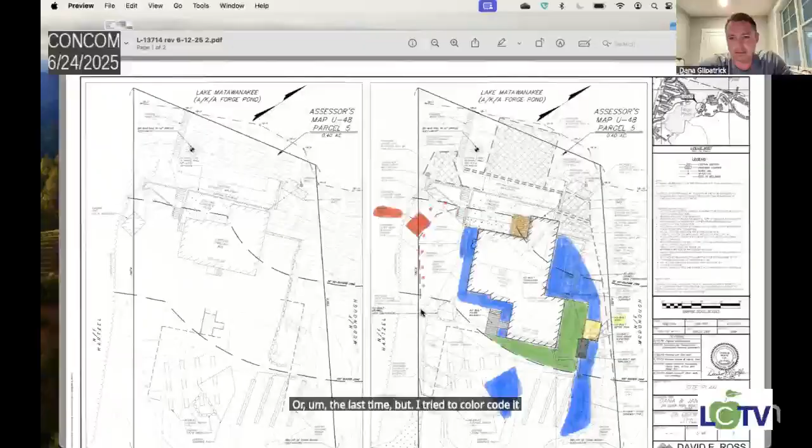Sure. So it was a bit confusing what the architect did the last time, but I tried to color code it so you can see what the differences are here, and I made a little table here, or key rather. Basically there was a crushed stone bed that was proposed right in front of my slider door somehow. That was an existing concrete pad, and it is still a concrete pad. Not being familiar with these drawings, I didn't realize that's what was being proposed by the engineers, so that is not crushed stone. That is concrete, as it was prior to the rebuild.

However, all this blue area is new areas of crushed stone that was not proposed in the initial plan, but was installed as part of the final grading. And then the other thing that was different is this was proposed to be a gravel driveway, and it was paved as an oversight when the paving company came, and it was a little chaotic. In addition, we have some plantings that were not part of the original proposal, but we put in here just because we like them.

So Tim, the request here is for a certificate of compliance with these changes. Yeah, so Dana was here at the last meeting, and the idea is just to go over these deviations from the approved plan and see how you guys feel, and if you're comfortable with approving it as is, or if you want to talk about other options.

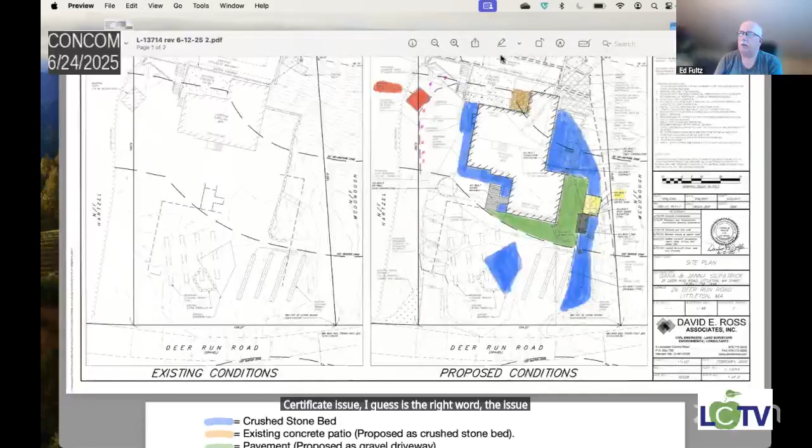So assuming that we're not going to expect a whole new plan starting all over, I'll propose that we accept the certificate issue, the certificate of completion, including the adjustments that are on the plan.

For something, sorry, I'm still new at this. For 26 Deer Run, DEP file number 2040884. Thank you, is that what you meant? That was yes. I'll second. Motion's been made and seconded.

Any discussion? Oh, just one quick thing. Where is the septic system located here? I'm just curious, did pavement go over the septic system at any portion? Part of the leach field. Do we know if Board of Health is good with that at this point? We don't, but the leach field is entirely outside of the buffer zone, if that makes a difference. Okay, like outside of the 100? Yeah. All right, is it shown on the plan?

Yeah. I did mention that to Francis, the Board of Health Director, so he is aware of it. Okay, and I would assume that they'll follow up with Mr. Gilpatrick if they're concerned. Yep.

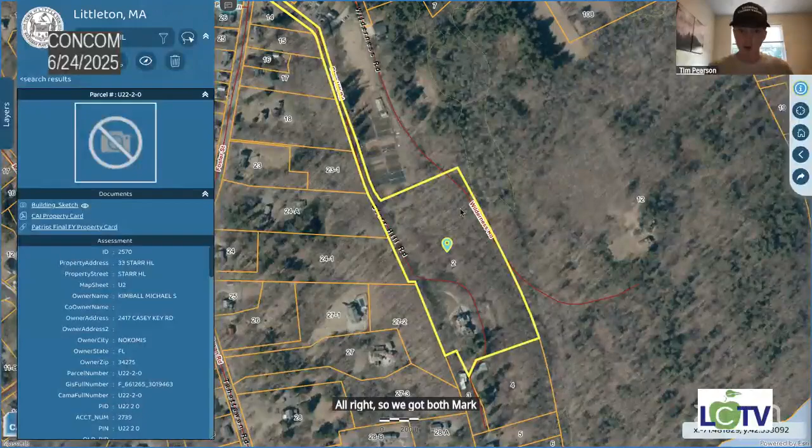All right, so we got both marks moved over at this point. It was brought to my attention that there was some tree clearing going on that might have been within the buffer zone. So here we have Prouty and the trail that comes from Prouty down here. The main wetland is on this side of the road. There is a culvert that goes under the road.

So the wetland kind of extends beyond this side under the road, and then runs parallel with the road on this side. The property bound isn't really accurately shown here — it shows Wilderness Road actually being on the property for 33 Starr Hill Road. But a large section of this area has been cleared, not entirely clear cut, but a large sum of trees have been removed. So that's the gist of it.

Can you lay out the timeline for us a little bit, Tim? Yeah, so, this goes back to — let me look at my calendar. This occurred... I believe it was, Andrew, do you remember the date? I believe we went out there the Friday before last. So, okay, had it been a week? Yeah, okay, so the 13th.

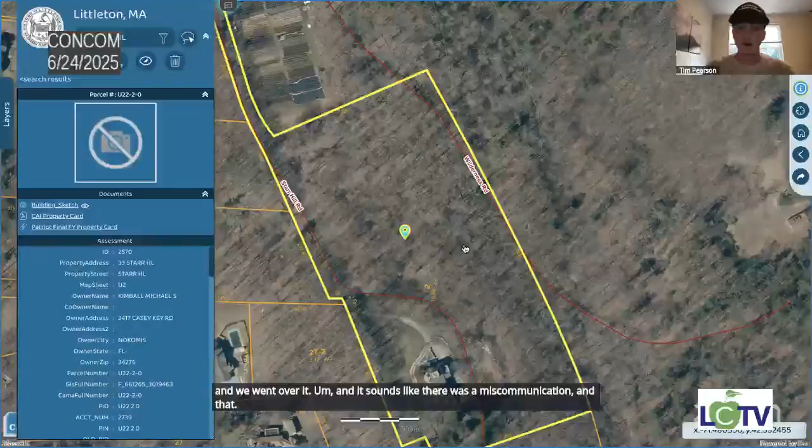And yeah, I met out there, the Gallaghers were very willing to meet me out there as soon as possible. I met them out there and we went over it. It sounds like there was a miscommunication, and that they were not aware that they were within the buffer zone. But I will let them speak to that.

And Sue, if you'd like to take it from there and share your screen, unless anybody from the commission wanted to talk. I think that's fine. Sue, if you've got information to lay out for us, I'd like to keep this confined right now to the discussion we need to have to determine whether or not we should ratify the enforcement order — so let's say nature and extent. Presuming we ratify it, then we'll talk about restoration and so on. Does that make sense?

Yep, that's fine. I'm just having a hard time finding where I can share my screen. Oh, here we go. I can at least show you. Oh, I'm sorry, who are you? I'm Sue Carter from Places Associates. Okay, thank you. Can everyone see my screen now? Yes, yes, we can.

You're probably going to have to orient us a little bit to what we're looking at. Okay, so Starr Hill Road, way over to the left-hand side of the screen is where Foster Street is. Starr Hill Lane comes up. This is the large house that's currently at 33 Starr Hill. So for those of you who have been out on the site, there was a pile of cut logs in this location, and you go downhill. New England Forestry — the road comes probably like this, and that's shown as Wilderness Road, and it actually curls up, and then right after this line, this wetland area here, it branches off.

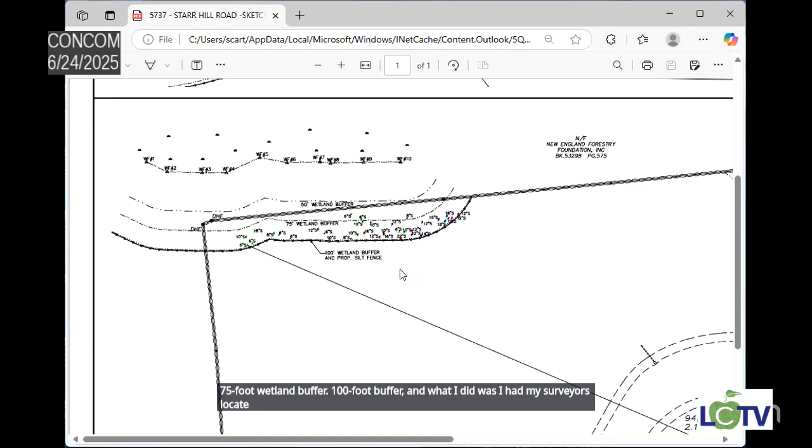And what I did was I had my surveyors locate every tree stump that was 6 inches or greater. What I have for you is kind of hard to see, so I did it at a larger scale. Let me zoom out just a little bit. I color coded the trees — if you see a 12-inch S, that means a 12-inch stump. In our rush to get this information for you tonight, my surveyor did not try to identify the tree type by the bark; he just simply located the stumps.

So what is up here represents what's shown here on the plan. There's this second wetland area with a buffer, and there is no work within that 100-foot buffer for that one. So once again, what's up above represents a 20 scale or a 10 scale zoom-in, and this shows it in relationship to the overall property.

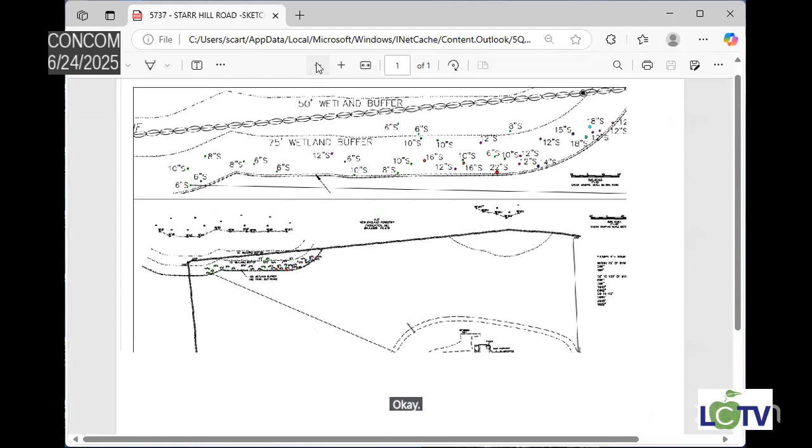I'm going to zoom out just a little bit so you can see the whole plan. So what we were able to determine is that there were 3 trees, 6 inches or greater, within 75 feet of the wetlands, and between 75 and 100 feet there were an additional 32 trees. I have a chart here I can zoom in on, if the commission would like, that states how many trees and which size diameter that tree stump is.

This is very helpful, Sue. I appreciate you guys doing the work to get this in front of us now. It's going to make for a much more productive discussion, I think.

I'm glad my surveyor could handle the heat today, so he deserves the credit. He was out there in the sweltering heat getting these located. I pulled field teams today because it was just too hot to do some things.

Mr. Gallagher, I see you've got your hand up. I want to make sure we're going to talk right now first about the nature and extent, and then we'll talk about restoration if we need to. Do you have comments on the nature and extent? Oh, you're muted, Mr. Gallagher, you're muted.

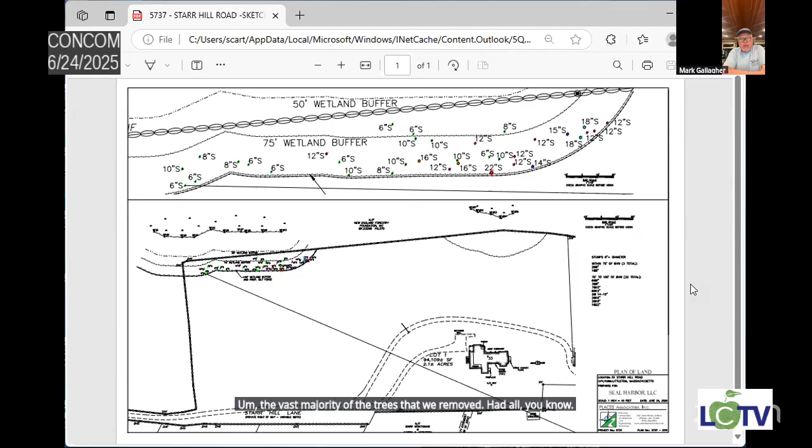Although Sue has pointed out there are 3 trees within the 75-foot buffer, and between 75 and 100 quite a few more, the majority of the trees—and we've left them there because Sarah asked us to do so—had all died. So although we can determine the bark on the trees, should we discuss a restoration, the vast majority of the trees that we removed had all passed their lives, and we removed them when we removed the invasives. So I just wanted you to know the history of the removal, and the reason that we were doing so was to clean up the property, get rid of the invasives. We were not aware.

Tim brought to our attention that there was, on the GIS, a wetland 100-150 feet away on the forestry property, but we were not aware. And as Mr. Crossman said, the closest to our property on this side of the road is essentially a drainage area fed by a stormwater catch basin up in front of the mansion on Starr Hill. That's shown on the screen right here.

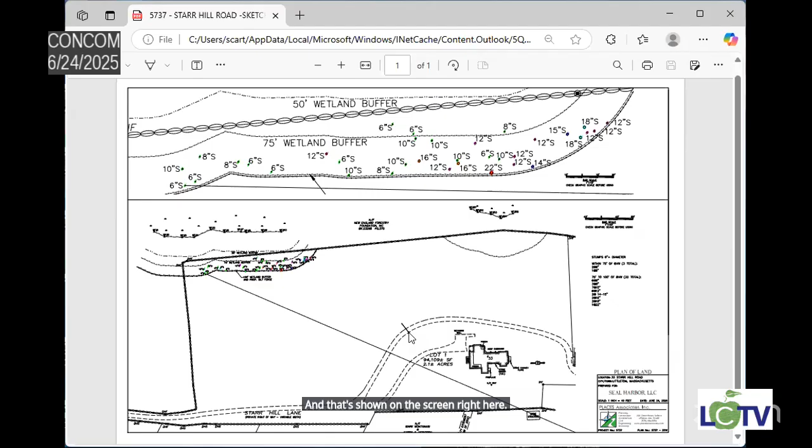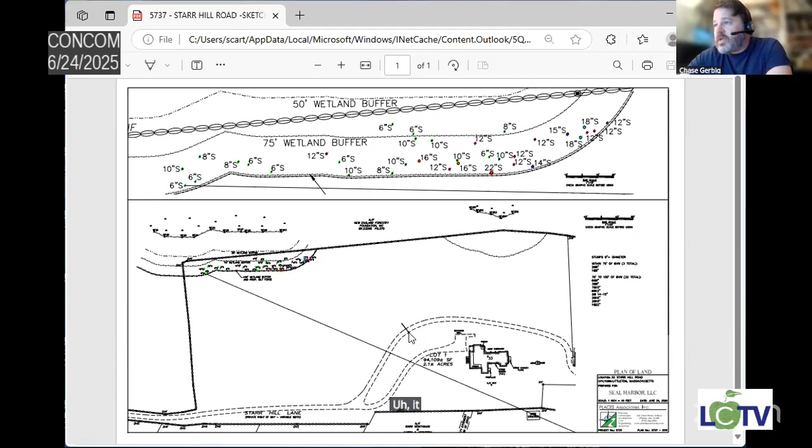There is one thing I want to address while we're talking about ratification of the enforcement order. One of the interests under the act is wildlife habitat, and it is not uncommon for applicants to leave dead trees standing in the interest of wildlife habitat. So I understand we're dealing with more than just dead trees, but it bears mentioning that dead or alive, there is ecological value and interest under the act, even with dead trees.

So with that, I'll turn it over to the commission. The question in front of us right now is ratification of the enforcement order. Tim, correct me if I'm wrong, we need a motion to ratify that. That's correct.

Is there any debate about ratifying this enforcement order before we move on to next steps? So are we saying this is or is not in the wetlands? Well, to ratify it would be to say that there was an impact to the resource area and that we need to take some enforcement action.

My take here is that there was an impact to the buffer zone. I think we will want to understand the extent of that buffer zone. There may be some disagreement, at least right now based on high level field observations, about the extent of it, but it appears there's no doubt that there was at least some impact to buffer zone.

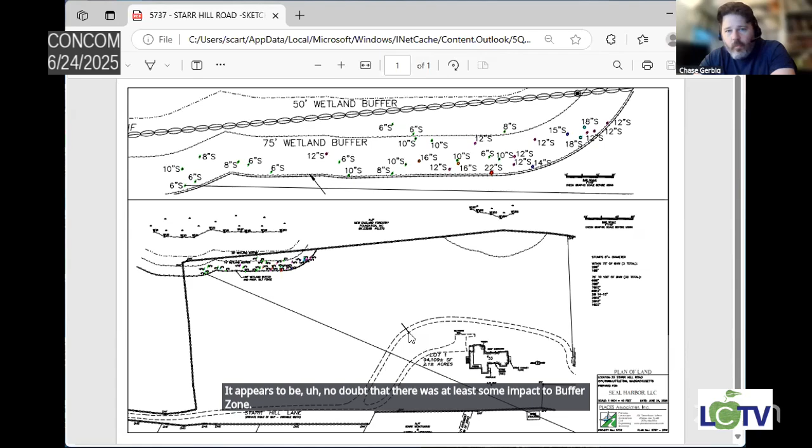I'd make a motion that we ratify the enforcement order. Second. Motion's been made and seconded. Roll call vote: Ed, aye. Carl Melberg, aye. Michael Livingston, aye. Kyle Maxfield, aye. Chase Gerbig, aye. And myself, aye. It's unanimous.

Okay, so now, Mr. Gallagher, we're going to move on to the second part of this discussion, which is where do we go from here? Let me put an idea on the table. Before we go too aggressively down the path of determining the right restoration in terms of tree replanting and so on, I think we should have a third party take a look at the delineation. Mr. Crossman, please don't take that as anything other than us needing to do our due diligence to confirm the line is correct. It sounds like this one might be a bit more complicated than normal.

My recommendation to the commission would be that we have a third party come out and take a look at that. I was thinking the same thing, Chase. I think that's the call. So I would support that. Sounds good. At your expense.

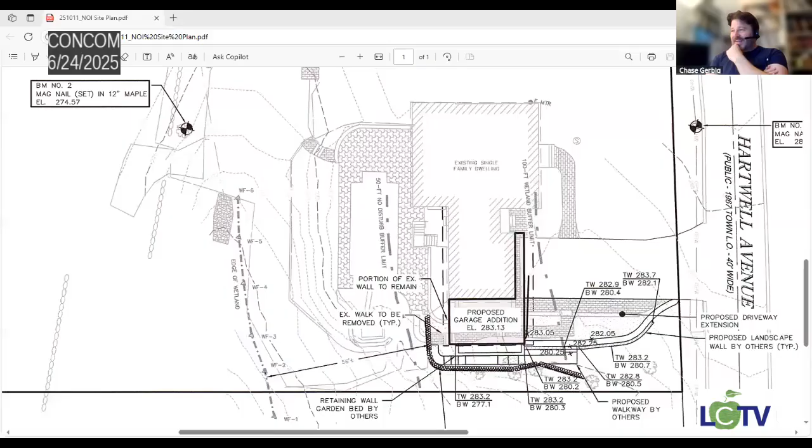All right, good evening. I'm going to scope out just a whisker so we can see the whole property. Everybody is familiar with Hartwell Ave and where 76 is. If not, let me know and I'll zoom over to the locus.

This is the existing property here. The property itself is just under an acre, goes back and up the hill and is all wooded behind. This is an existing cape with an existing two-car garage, with a walkway, patio, deck, and pool put in some time ago, plus a retaining wall. There are two different sheds, one here and another built off of it, and some trails. This is all fenced off in here.

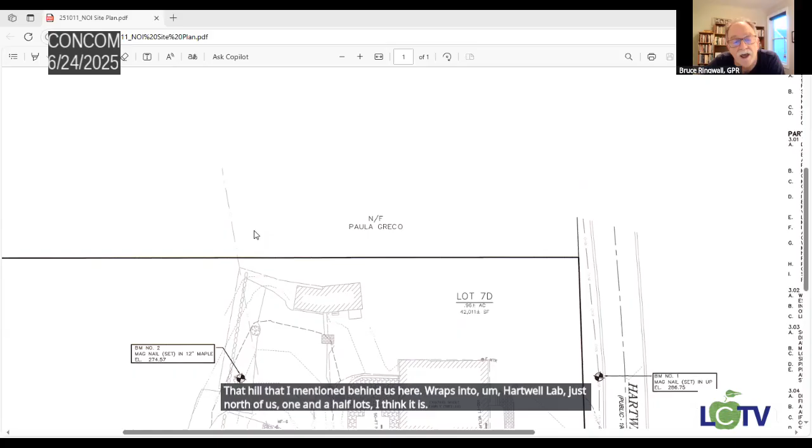The wetland line was delineated starting off the property here and coming up, terminating where the hill behind us wraps into Hartwell Ave, just north of us, about 1.5 lots. If there's any valley or swale at all, it's all piped to this point. Then here it opens up, and a couple lots south of here it's piped across a couple more lots before opening into a bigger body of wetlands.

Having said all that, the wetland line's 50-foot buffer comes through the backside of the existing pool. The 100-foot line is through basically the front of the house and the driveway. The side of the garage has an extended driveway that already comes out to a retaining wall and a walkway, plus a planter off the end of the garage, and then this walkway that ties into the back to connect front and rear.

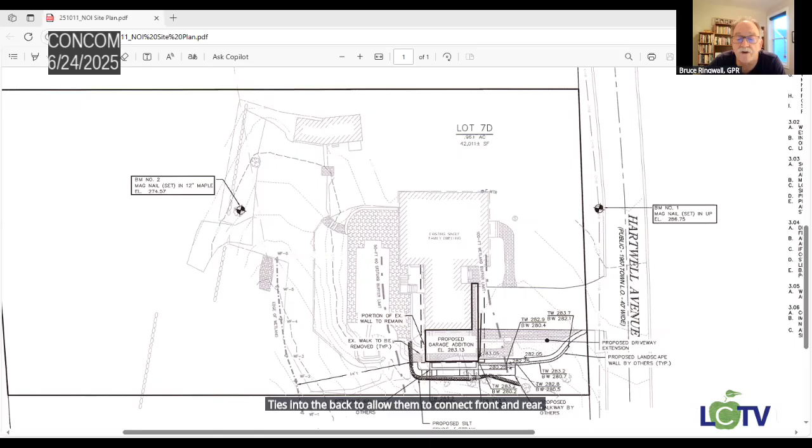This is all landscaped with stone mulch rather than mulch, with regular mulch up in here, nice yard and such. The plantings in this area that will get disturbed, the homeowner wants to replant outside the buffer in the front yard to maintain as many as possible. There is one tree here that will need to come down, right here.

We're proposing to widen the driveway and put an addition on, adding a third bay to the garage and living space above. We're actually going to take down the existing garage — this dash line pushes the foundation back. Actually, no, this is the line of the foundation right here, which comes to the front of the building just a whisker. The dash line is the roof overhang. We have erosion control proposed to be installed around the edge.

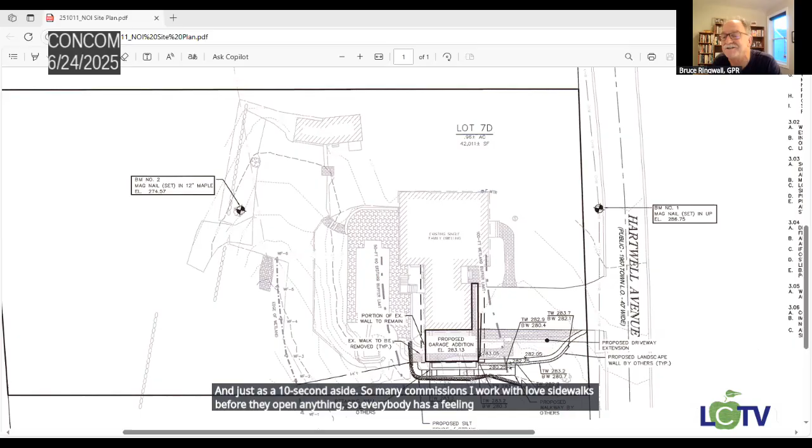I have photos, but we were about to set up a site walk — we did set one up last time before our timing got all messed up. As an aside, so many commissions I work with love site walks before they open anything, so everybody has a feeling for what the site looks like; it saves time too. I'd love to schedule a site meeting with you folks now, because I've seen one thing on site I want to address with a modification to the plan, but I don't want to do that until you've all gotten there and we can have a conversation. So if we can go for a continuance to our site walk, I'd be happy, and I'll take any questions you might have, but we went through that step once.

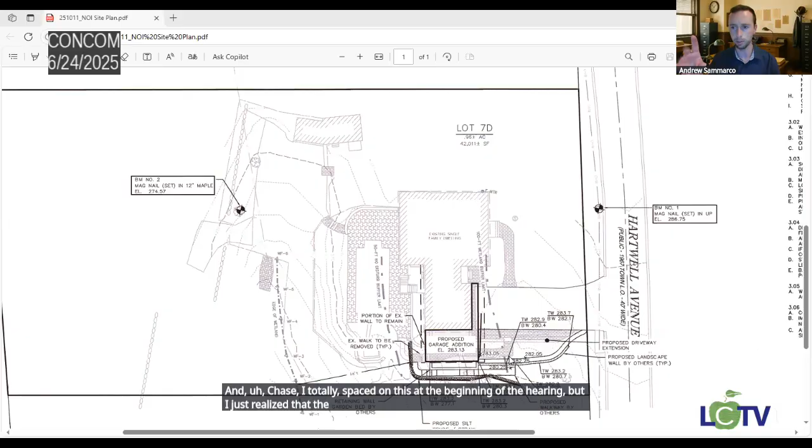Chase, I totally spaced on this at the beginning of the hearing, but I just realized that the cemetery department, we have a new area that was just donated a couple of years ago that actually abuts this. So I'm going to recuse myself from this hearing. I should have done that at the beginning.

Sorry about that. I don't think you need to recuse yourself from a cemetery commission to doing another public job, Andrew. I appreciate it, but I appreciate your opinion as well. If you think it's important for you to recuse yourself, go for it. But I think that's a conservative approach. So do whichever way you like, but certainly we value your opinion a great deal, especially since you know the area a little bit.

I haven't, with the sharing of the screen, I can't see who all's on. Do we have a quorum otherwise? Yeah, we do have a quorum, Bruce.

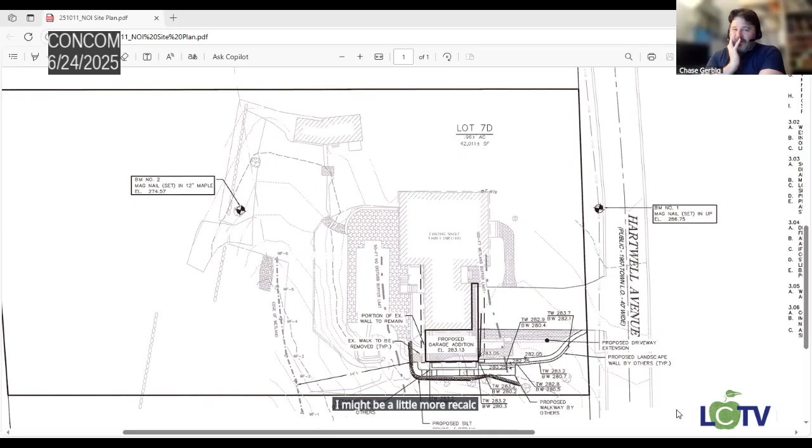Okay, thank you. And I'm going to guess, I might be a little more recalcitrant, Andrew, with your recusal if I thought this was going to go on for a long time, but I don't think this will go on for a lot of meetings. Yeah, I can't see anything here, and I've done a few things. We'll have a site walk and we'll close, I hope.

I think that sounds perfectly reasonable. But before we get to scheduling the site walk, Bruce, one of the things I want to make sure we haven't tripped over here is the addition of impervious area and our wetlands protection, our local bylaw. So everybody knows our local bylaw for the 50-foot no disturb, but there is an additional impervious area piece. Have you looked at that? And if you have and you wrote it down and I didn't read it, then that's 100% on me.

In our project narrative, our garage living space we had 420 square feet of impervious area. So we're within your percentages and realm. Sorry, I didn't read that part. No problem. Okay, looks like we're looking to schedule a site walk here.

With the 4th of July in between, what's everybody's pleasure? Could we do it early next week so that Bruce and his client have a chance to sort of process things and be ready for the following meeting? Or should we do it after the 4th?

I can tell you, I will be out of town the first 2 weeks of July. When's our next meeting? July 8th, I believe we said. Yep, that's correct. So I'm going to be missing the next meeting, just so you're aware. Hey Chase, I'm going to be out next week.

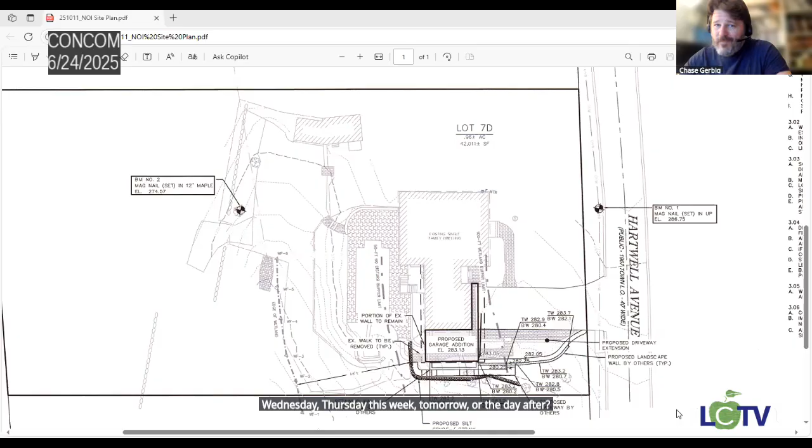What does this week look like for folks? Do you tuck something in Wednesday, Thursday this week, tomorrow, or the day after? I could do tomorrow or Friday. Thursday's impossible for me. Okay, I could probably do Friday, but I won't be here for the next meeting, so I'm not sure that I'm terribly high on the priority list.

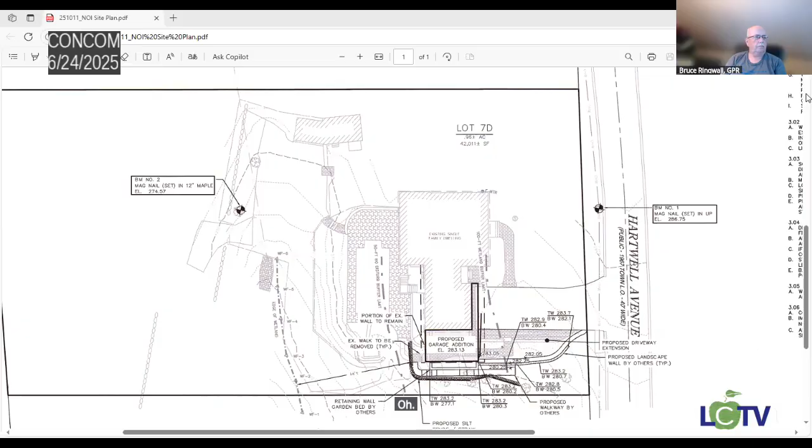I'm sorry, I didn't see who's not here at the next meeting. Ed Foltz. Oh, hey Ed, sorry, didn't see it. That's okay. Can I stop sharing my screen so we can see everybody? Yeah, go ahead Bruce, that's fine.

Thanks, that's much better. What do we think of just trying to rip the Band-Aid off and do it tomorrow afternoon? Would that be... Michael, you said you could do that. Yep, I can't do tomorrow afternoon, but if you guys are comfortable doing it without me, by all means.

What time are you thinking of? Michael, any thoughts? I can pick a time anytime. I am home rehabbing from total knee replacement, so this is going to be my first outing. I'm excited, I'm going whenever.

Aside from a 1:30 to 2:30 meeting, I'm available tomorrow afternoon. Carl, is there a time that could work for you? Probably after 2:30 would be better. Do you want to set it for 3:30? Yeah, let's do that.

3:30. Okay, so it looks like we'll have 3 commissioners that can make it, and maybe more, and we'll plan on seeing you out there at 3:30 tomorrow, Bruce. Tell Andrew to come too, he's good for this, we got to get him out of the office, especially where it's so old. Sounds great, we'll see you there.

There's a fair amount of parking in the driveway. We all know Hartwell's gotten faster with the paving, so there's a fair amount of parking on site. All right, and thanks guys.

Just a brief recap. We started a couple meetings ago requesting an addition within the 50-foot buffer and a septic system that was outside the 50-foot buffer. Since then, we've been trying to work with the commission, and we have moved the addition outside the 50-foot buffer zone. We have moved the erosion control barriers to the 50-foot buffer zone. We've added some dry wells. We provided a planting plan. We feel like we have done our best at this point to try and meet all the commission's concerns. We would like to move forward tonight and hopefully get to a point where we can get an approval from the commission. That being said, we're still open to discussion, and we are certainly interested in any input or conditions that would make this plan amenable to them, so that at the end of the day, we can move forward with the project.

I think Randy's grabbed the screen and is showing our planting plan, but I will let him discuss that.

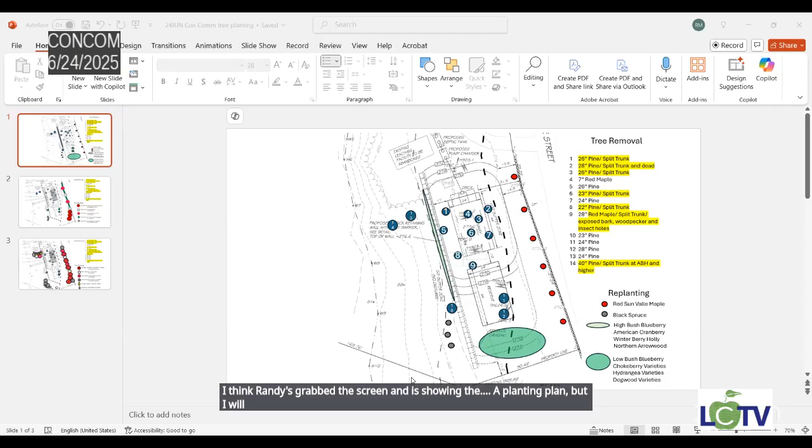Good evening, Commission. Where we left off from the previous meeting - apologies on that one. I was at an active training base, and in hindsight probably shouldn't have had the other meeting between helicopters and a bunch of other things. I was pretty much lost in that.

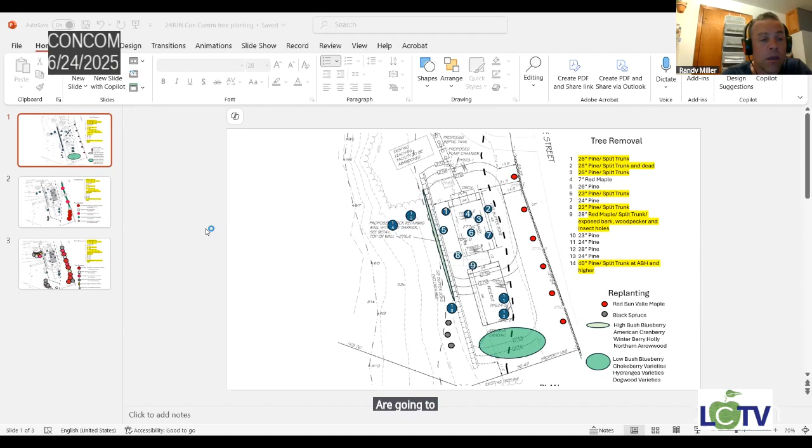So going forward, what I have here is basically just recapturing the last few meetings, with what I originally did for tree plans, and then this current one. At the second meeting, I created this plan, which showed the trees being removed - the red Sun Valley maples and black spruce. At the conclusion of that meeting, the commission determined we needed to adjust erosion control, and I needed to add more trees and do something with the shrubs to indicate how many shrubs were going to be planted. So for the next meeting, I created this plan.

This plan was basically me trying to up the tree count as best I could to try to meet the 2-to-1 ratio. In doing so, I picked the Green Giants - they weren't necessarily my favorite tree to pick, but I was able to put a lot in a small amount. However, during the course of that meeting, it seemed like the commission didn't really agree upon the Green Giants, which I can agree upon as well.

In light of that, the issues that were brought up were trees 11, 12, 13, and 14 that were being removed. We did talk about the arborists that came in for 13 and 14, and with 11 and 12, I just want to point out that during the course of creating the plan for the septic system, there were test holes dug. If you look at the screen, you'll see 11 and 12 had test holes dug next to them, and as a result some roots were dug up with those trees. So my concern for those trees still exists, with potentially them falling onto the septic system itself.

And then with this current plan, this was a little bit more of a hybrid between the first two.

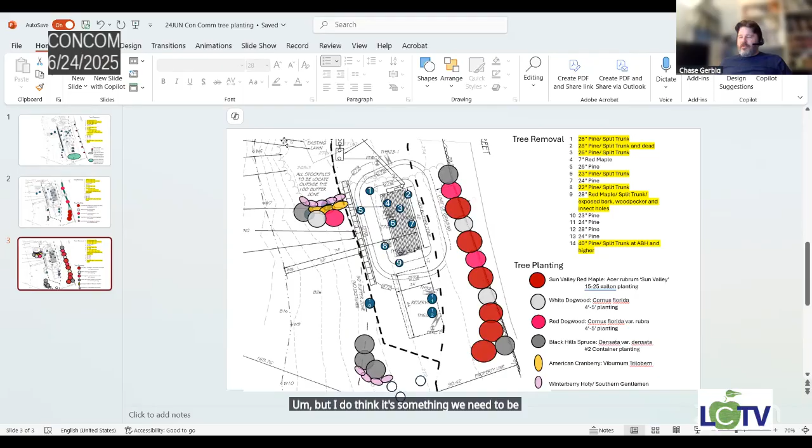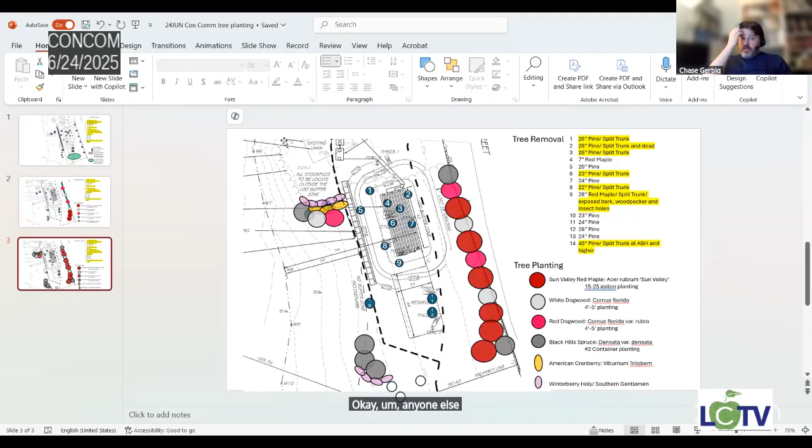I'm on board with those motions. Anyone else, or should we entertain a motion here? I'm liable to take silence for consent.

Before we get to a motion, Tim, I think a couple findings need to be memorialized, even though they're in the written components here. One, the removal of the trees within the 50 via a crane. Memorializing the findings that those trees in the naturalized areas of the site won't have their stumps removed. I think we want to make sure to memorialize that and make it clear, even though it's written down, these things can get lost.

Any other findings y'all want to see? I will tell you, John, you entertained the idea of moving the erosion controls down. I'm not sure it's necessary. What we're going to end up with around the tree is a bunch of mulch, that doesn't seem to justify moving erosion controls around. I don't want to move the line. I would be more in favor of new, temporary erosion controls around it or whatever. I don't want to give the contractor additional room to play. That's why we moved it back to the house anyway.

And I agree. I think we approved some tree removal at our last meeting, right? With the understanding it was going to be top down via crane, and we didn't require erosion controls. So I feel a little awkward asking Mr. Miller to do that now. Appreciate that. Thank you. Yeah, I'm much more comfortable with that remediation plan now.

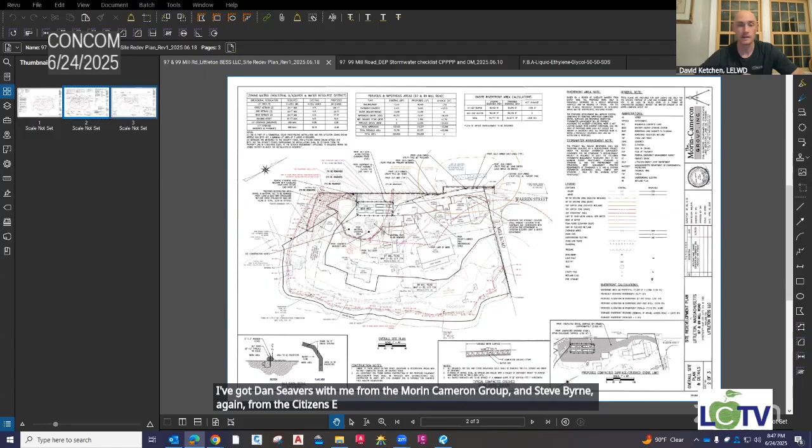Dave, is this your project here? Hey everyone, yeah, sorry, some connection issues getting promoted to the panelist position right here. Yes, this is my project. I'm Dave Ketchen, Assistant General Manager for the Littleton Electric Light and Water Departments. I've got Dan Seavers with me from the Morin Cameron Group, and Steve Byrne again from the Citizens Energy Group there. Dan is going to kick this off from our last meeting and last site visit.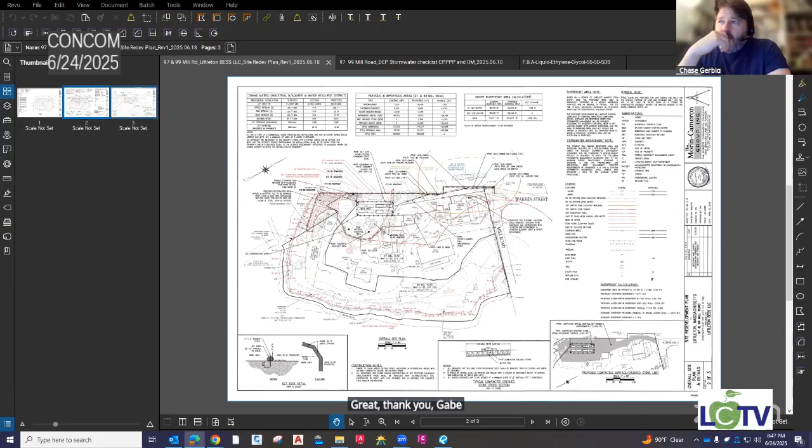Okay, all right, thank you, Gabe. So, for the record, my name is Dan Sievers with the Morin-Cameron Group. I am going to give a couple updates since the last time we met. First update is there is no update from DEP. Unfortunately we don't have a number yet or technical comments, so we're going to have to wait on that. Since we last met, we have gone in front of the planning board, and they have approved the project.

We also resubmitted to both DEP and Littleton Conservation the notice of intent, WPA Form 3, with updated fee, stormwater checklist including O&M plan, as well as a construction pollution prevention plan, and a revised site redevelopment plan. I can run through some of the updates on the plan, one being the applicant's name, which is Littleton BESS instead of Citizens Energy.

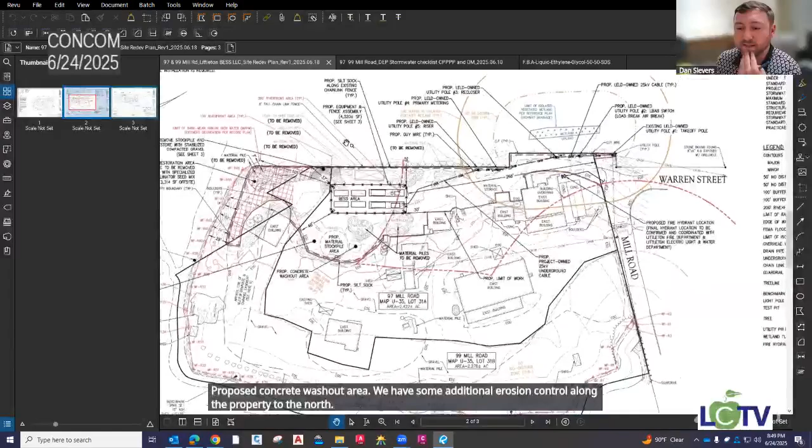Last time we met, we talked about some things we wanted to see on the plans and in documentation. Some of them being: the proposed material stockpile area, proposed concrete washout area, additional erosion control along the property to the north, and we've been in communication with the fire department. They told us it would be advantageous to propose a fire hydrant on the site, so that in the worst case scenario of a fire breaking out, which is not expected, but if it were to happen, there would be a fire hydrant on site that would allow the street to not have to be closed down.

Which we have proposed right here. We have a note that the final location is to be coordinated with the fire department and water department.

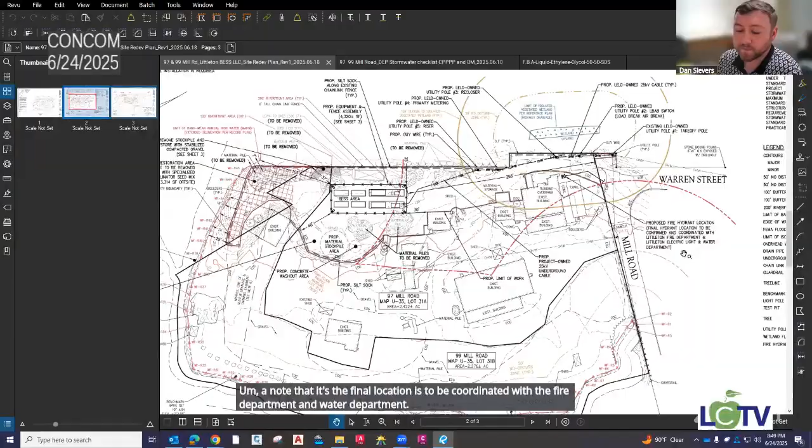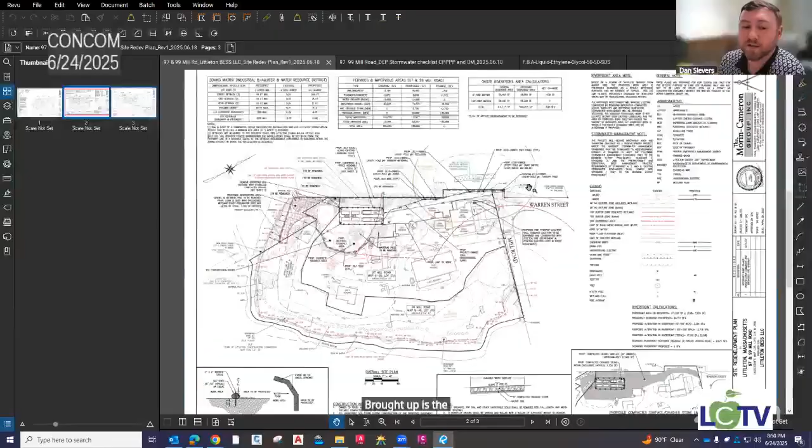So I think that's all the updates as far as the plans and submittals go. And I think the main other concerns the commission has brought up are the chemical makeup and the actual system itself.

Steve, are you on? Are you available to talk further about this? Yep, I'm here, Dan. Awesome.

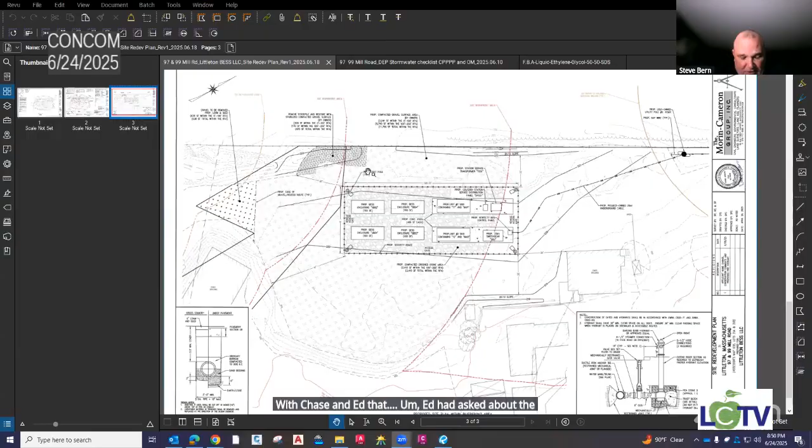Go for it. I think when we were on the site walk with Chase and Ed, Ed had asked about the liquid coolant system, and I think we sent over some of the documentation earlier today or earlier this week. The liquid coolant, I sent the data sheet, is ethylene glycol 50/50, so it's got a relatively large content of water, so it's considered to be environmentally safe.

There's a total of 190 liters of coolant within each module cooling plate per battery container, and the site has 4 containers, each individually - they're not interconnected with that coolant. It's a closed loop system, so there is no storage tank and no refilling the system. Once it gets filled during the manufacturing process, there is no refilling needed, so there's never any opening of the tank or anything like that.

And there are alarms as part of the overall battery energy storage management system that would provide alerts if there's a loss of fluid or a leak. The containers are weatherproof, so if there were to be a leak and an alarm, it would be within the container and would not be spreading outside of the container.

Lastly, there are other coolants within the system for the HVAC, but that's R32, which my understanding and what the manufacturer sent to us is that it's the most common refrigerant used in the HVAC industry. There's nothing there planned to be banned or anything like some other refrigerants that are under question now. So that's what I got from researching what was in the liquid coolant for what Ed had asked.

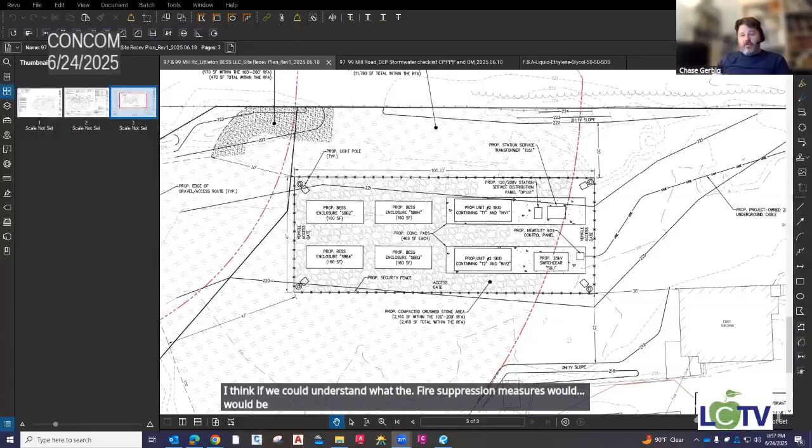I also don't think we've heard yet. One of the things we've wanted to understand is what would firefighting look like here? What would need to be done if there was a fire? My understanding is you guys were interacting with the fire department a bit, and obviously there's a hydrant coming in here. If we could understand what the fire suppression measures would be so we can account for those from a resource area impact, that would be very helpful.

I don't think that needs to be a big, long, drawn-out thing. If you want to summarize it in a quick memo, or even have a member of the fire department here, since we're representing a town department in multiple contexts, that might be the most efficient way. That's one of my biggest concerns here - we've got a big electrical fire risk with a battery station. What does that mean if there's a fire?

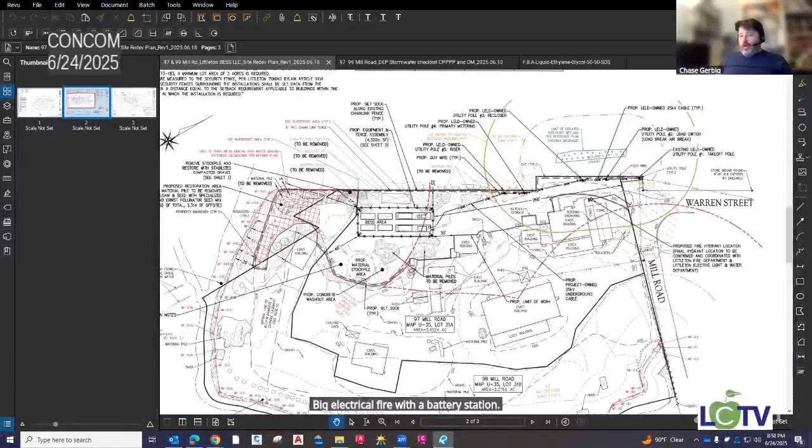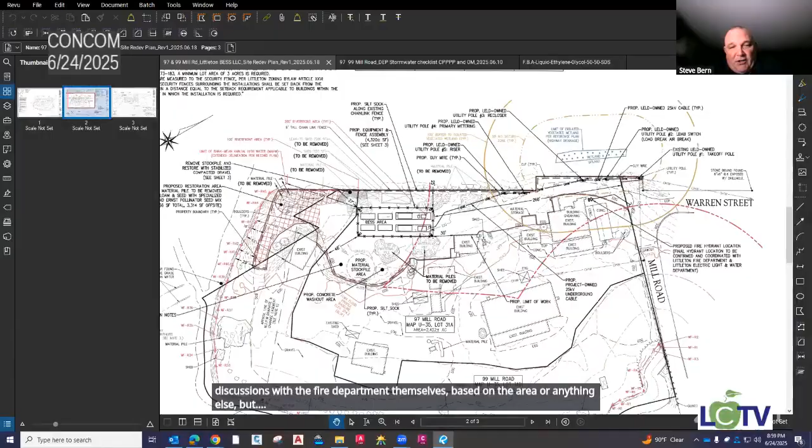Yeah, we'll have an emergency response plan with the fire department. The industry standard these days is not to flood - if one of these containers were to have a thermal event, you don't flood that container. Any use of water would be to keep the other containers cool, so the water would be limited. But we haven't had these discussions with the fire department themselves based on the area, though that is part of what we expect to go through - a pretty extensive fire narrative and emergency response plan with the fire department and with Littleton Electric, because it's their site.

We've talked a couple of times about this topic and how to contain any potentially contaminated water that's used to put out a fire, or foam, or whatever it is that gets used. I don't know if there's been any real answer for that though.

Yeah, it's something we've been actively working on, trying to get a clear answer from the fire department. We haven't gotten an exact response back yet, but we will work towards that for the next meeting.

Thank you. Otherwise, as far as reporting out what I saw at the site walk, the whole area is severely degraded. So to the extent that this project goes in, it's going to be an improvement on what's there in many regards. So I'm generally comfortable with this once we resolve some of these details.

We'll see what Mass DEP has to say. Any other comments for Dave and team that they need to think about so that next time they're in front of us, they don't get blindsided by anything?

Dave, I'm going to suggest that it may not make sense for you guys to come back until you have Mass DEP comments. But happy to see you if you want to spend your Tuesday evening with us. I would suggest you can just work it out with Tim if you don't have comments by our next meeting. Okay, appreciate that.